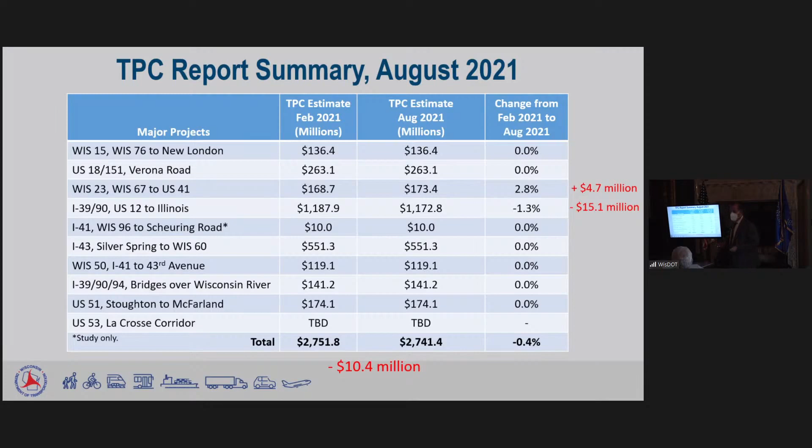I-39/90, all of the lets are done. It's open to traffic, and that project—I'll talk about the north-south project—those were two big projects where the change orders came in low on the project. So we were very pleased with those projects, and that's good work by the project team.

Let's go now to the Southeast mega projects. We had a $9.1 million reduction in the north-south project, and that's because all of the work, all the lets, are done. That project is essentially complete, and we were adjusting the cost estimate downward to reflect actual cost conditions.

The zoo interchange, there was no cost increase. We didn't reduce it because we're in the middle of the north leg reconstruction, so it's too early to talk on that. But again, good news—9.1, 10.4, that's the basis of a 19.5.

Joe, I think you have a question. Okay, Joe—looking at these graphs and tables, what are the actual project costs compared to the original estimates for those projects? Your data here shows February, August compared to February, six months. If you don't have it, that's fine.

We do, I just want to give it to you later. It's in the TPC report, in the back of tab 3. And then we relate those to the original project costs. Let me see, it looks like page five, right before the report starts with Highway 15.

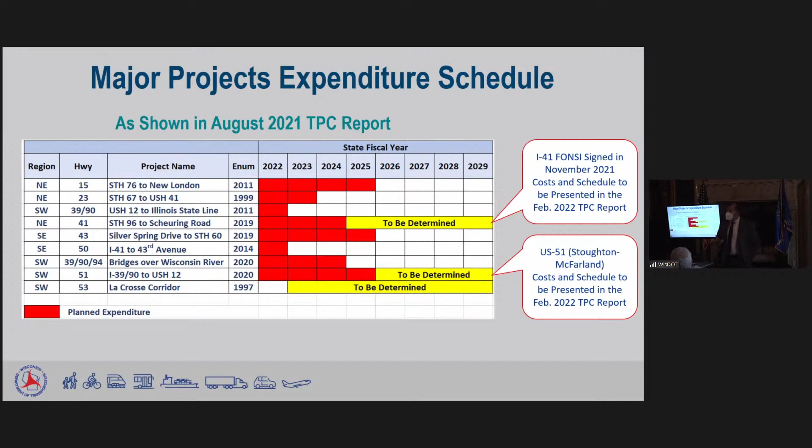And we just weren't able to get support to coalesce on a solution alternative. Secretary Thompson challenged us—he said, hey, can you broaden your thinking about ideas with respect to solution alternatives? The result of that, what Justin's going to present today, is a new approach that will address the needs on the corridor in a way that will be more consistent with local preference. So we're excited about that presentation today.

So now that we know the 41 costs and we schedule things in the next TPC report—if our program level stays at $282 million, and if we got future biennial program increases to match inflation—we're full through state fiscal 27.

And why that's important, I think, is because when we talk about La Crosse today—if you give us the okay on that—where might we be able to actually have funding for construction? It will be in state fiscal 28 and 29. There's room for projects. In 28, that's about $100 million of room, and in 29, about $200 million of room.

Timing, that seems like a long time. The timing, we think, works out pretty nicely. Environmental documents do what they do. Say the environmental document is 3 years, 22, 23, and 24. Final design could be a 2-year process, and then maybe a year to procure, get all the utilities wrapped up before you start. So let's say that's 25, 26, 27. By the time we're ready to rock and roll with hardcore construction, we would have significant room in the program to fund that construction. That's the point of showing this slide, because it will be relevant to the project later.

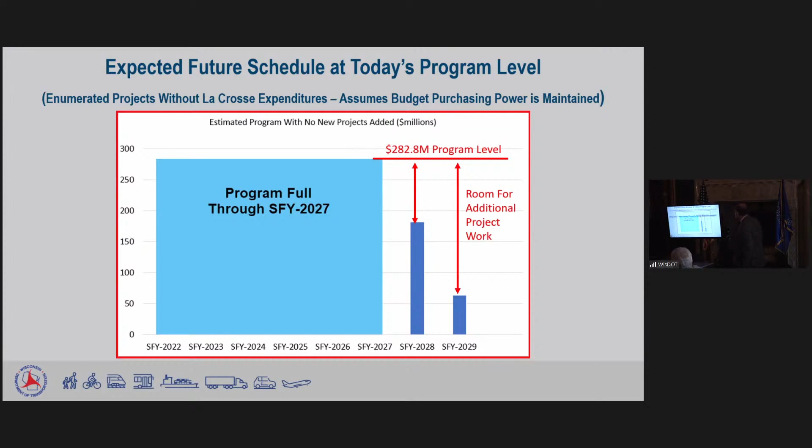So why aren't we recommending new study projects? You'll remember we talked about 39/90 Madison to the Dells. We're studying US 51 from the Beltline north to 19. We have a Beltline study going on. We're not recommending new projects this year. The statutes tell us if we're going to recommend studies, we have to give you an initial list by October 15th of the odd year. And we didn't give you one. And here is why.

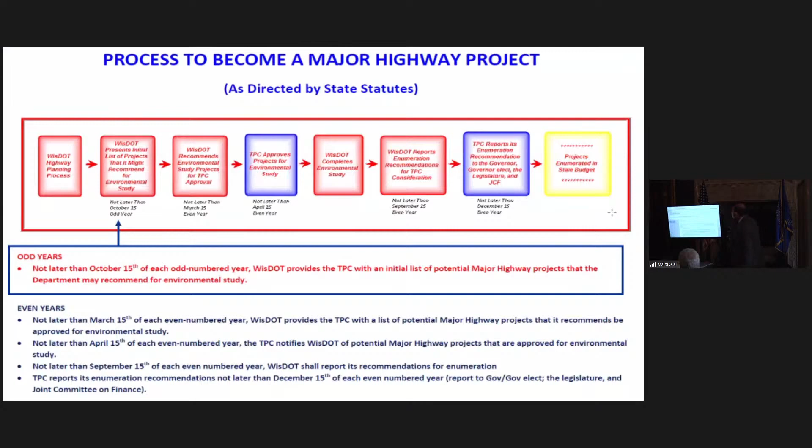Statutes that we went over last time, if we were going to recommend a study to you and ask you to recommend its construction, statutes require that we have some hurdles that we meet for you to make those recommendations. One is that if we have to make the recommendations in the fall of the even year, so that next July, which is when the budget we would hope would come in, we have to demonstrate that we could start construction within 6 years, not only on every project enumerated, but also on the studies you'd be approving.

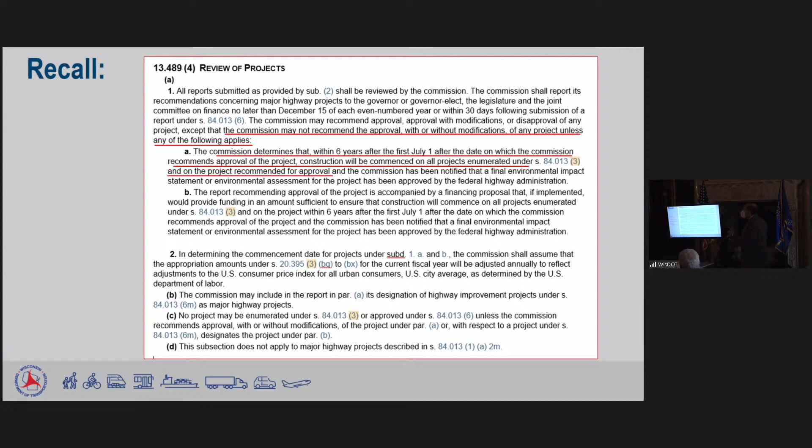Well, I mentioned we talked at the last meeting, 39/90 Madison to the Dells, premier recreation and freight corridor. That's a priority for us. So that, and we have pieces of 51. We think that project might come in stages. We would want those to be the next projects likely that will be coming to you and asking you to recommend. And with those as our priority, it's just too soon to recommend other studies.

Because if we couldn't build them and they have to sit, two things happen. The first one is that Federal Highway Administration will not sign an environmental document unless we have a reasonable path to construction. For major highway projects like this, they've usually signed them on a study recommendation contingent upon your recommendation and enumeration in the budget. So if we had a study out there that we had to wait on for several years, we wouldn't get it signed. And even if they did sign it, having something sit for a couple years, we might have to come back and revisit it and spend money on the study. So that's the reason why we're not recommending studies this year.

It wouldn't be unreasonable to think that in 2 years from now, we might have a study to recommend.

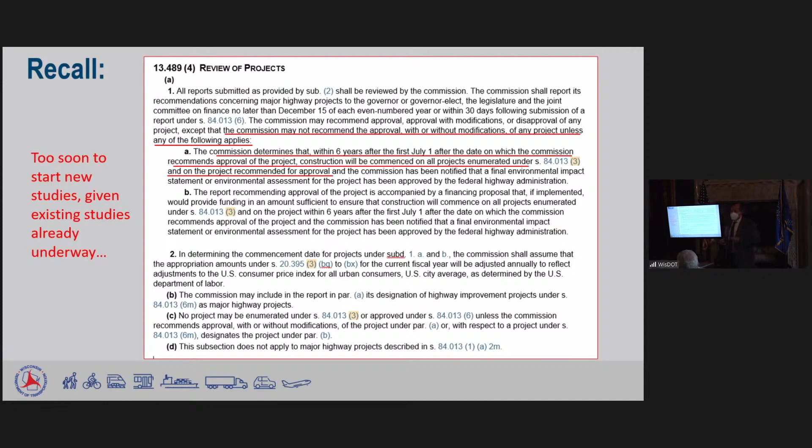And if there are no questions for me, Jeff Gust is next up.

While we're waiting for Jeff to get mic'd up, we did just get a bid for our letting yesterday. We did see some modest letting savings, again, about 1.2%. So at least it wasn't up. It was better. So that's good.

All right, can you hear me? I'm Jeff Gust. I'm the Bureau of State Highway Programs Director. So I get the fun part of the job. I get to talk about the enumerated projects, what's going on, the status, how things are going on the projects.

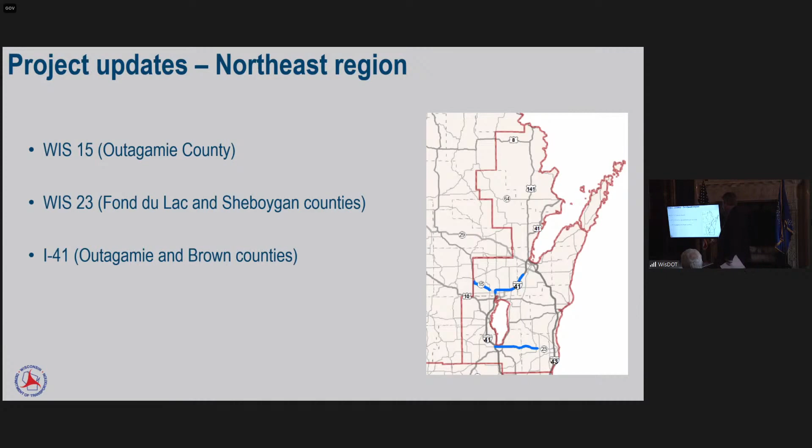So I kind of broke it down into geographic areas when I talk about the project. First I'm going to talk about the Northeast region. We have 3 projects in the Northeast region: Highway 15 in Outagamie County, Highway 23 in Fond du Lac and Sheboygan counties, and I-41 in Outagamie and Brown counties.

So the first project I'm going to talk about is Highway 15, and it runs from New London, and it goes to, with a bypass around Hortonville, and ends up at Highway 76. Now, the projects on the right-hand side of the screen, or the east half, have already been let. They're actually under construction on the bypass around Hortonville right now. They're working on marsh excavation there. And the west part will happen later. So the eastern part is expected to be open in late 2023. And that western, a little less than a third, would be late 2024.

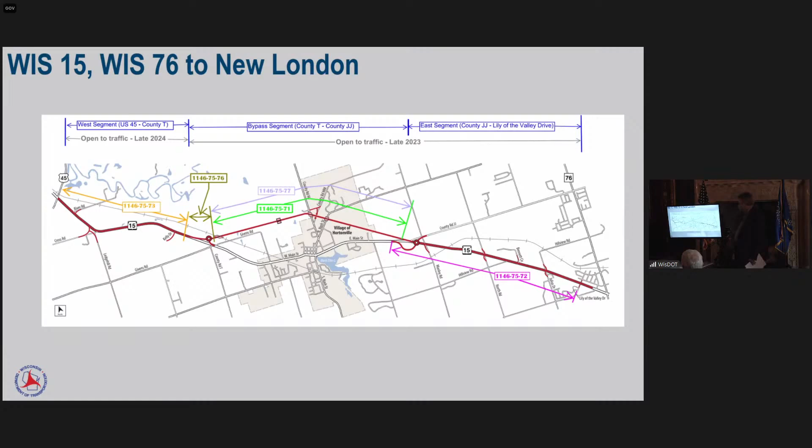Then I got some fun pictures to show you what's going on. So on the bypass, there's a lot of marsh, and they have to get through the marsh to get to things.

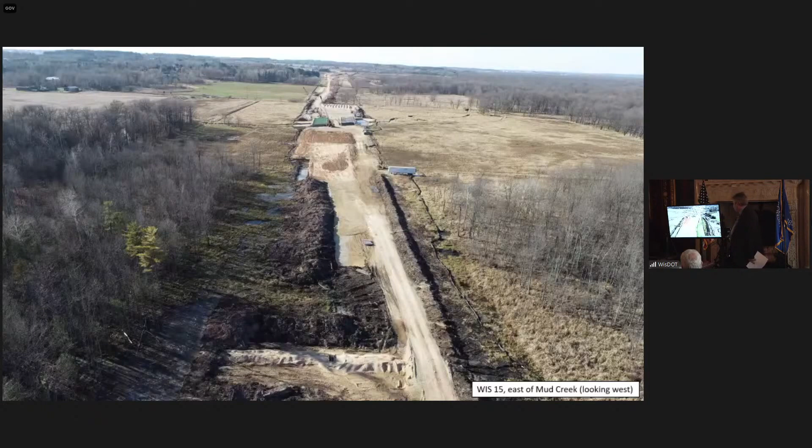This is just another picture of a grading operation. We're actually looking at County Trunk M and Mass Street up here. You can see the contractors filling in dirt, the bulldozer and the 6-wheel truck bringing in materials. And we're doing a good job with the environment. You can see that as they get the fills up, they already have the topsoil back on, erosion mat on, and vegetation is already growing. So we're doing what we can to minimize the impact.

The next project I'm going to talk about is Highway 23 from Highway 67 to Highway 41. So this is adding from 2 lanes to 4 lanes. As of today, from County W to the east has already been opened, so that's 12 of the 19 miles opened up and ready to go. We're working on the other part of the project right now, and this project does include a new interchange at G and at UU.

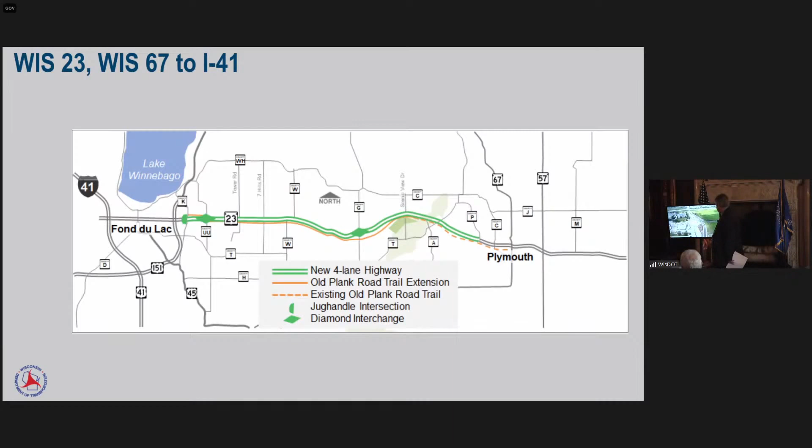So I have a picture here showing where we're building the roundabout. People are liking roundabouts a little bit more now, but it was under construction. To make this work, we had to build a temporary bypass. This is an Aurora healthcare unit over here, so we needed to get people to and from the healthcare unit at all times, keeping things open. We were able to do that by building this temporary road around while we built the roundabout. Now this has already been removed, but it worked for that. We just couldn't detour this route - you had to keep it open at all times.

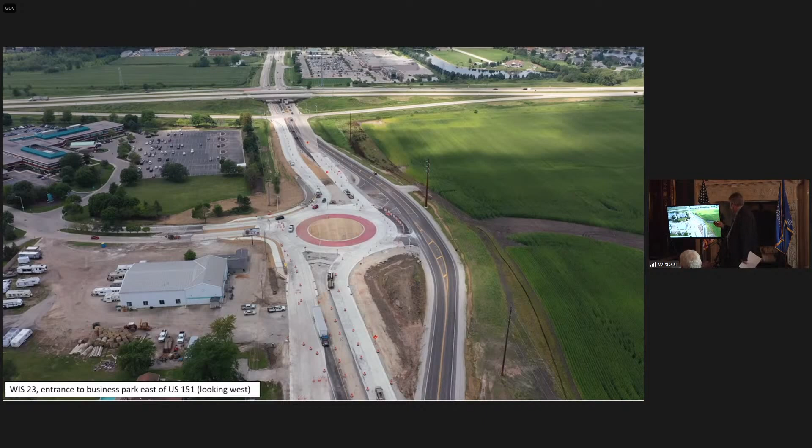And that's 151 in the background. So here's another example of what's going on here. You can see the interchange up above there. To get access, sometimes when you're building more of a freeway type facility, you have to take some access away. So the local street's tied in and ties up there.

This next road is the Old Plank Road Trail bike and pedestrian trail going there. Just to show you we're cost conscious, you can see the 2 lanes of traffic and one is black and one is white. Normally on a lot of these major projects, you'd be building everything brand new, but what we did here is we had some life left in the existing lanes. The westbound lanes are blacktop because we found we could just resurface it and get more life out of it, so there's only new lanes in the eastbound direction. We're doing what we can to maximize the life of the roadways that we have.

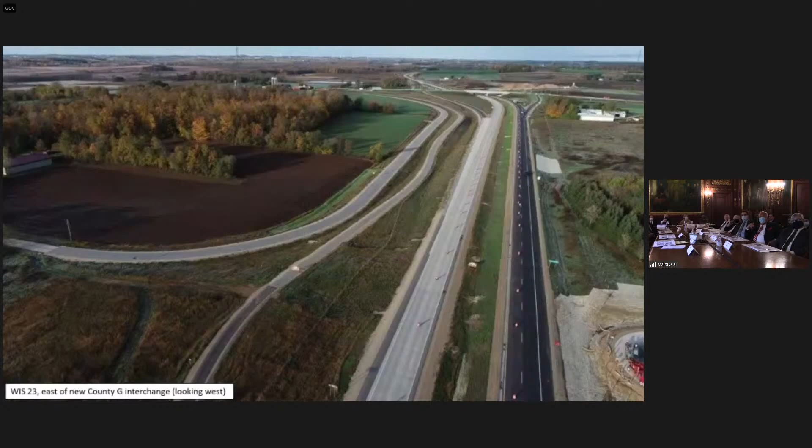Question for you, Jeff - can I ask you, that blacktop, what's underneath that? Is that concrete or blacktop underneath? I'm pretty sure it's blacktop underneath, but I don't know all the layers on that. Tom, do you know? It's concrete underneath. So do we know what the long-term effect of that is, going blacktop over concrete? Yes, we do. We do life cycle analysis to make sure we do the right treatments at the right time.

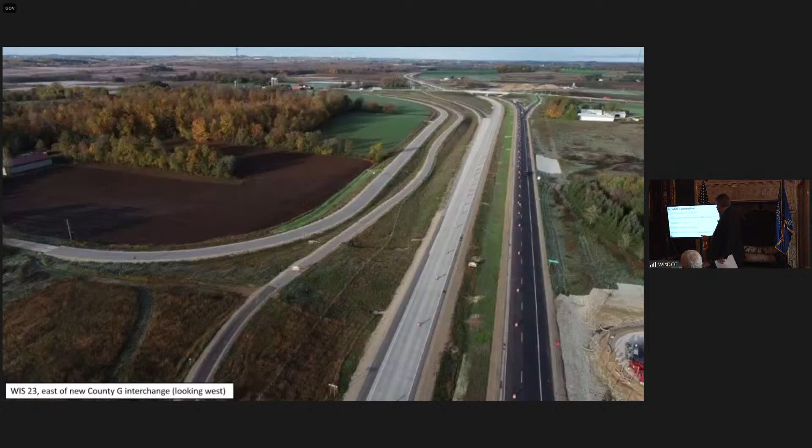The next project I have is I-41. This project is 23 miles long and runs from Highway 96 in Appleton to County Trunk F in De Pere. There's a total of 12 interchanges within that corridor. We're reconstructing 7 of them, one being the one at the 441-41 system interchange, and one new proposed interchange just south of County Trunk Highway F, for the Southern Bridge corridor. The other interchanges are only getting ramp work done.

This project was just enumerated in the 19 to 21 budget. As Joe had mentioned earlier, we just had a finding of no significant impact from the environmental document. There will be beginning final design in January of 2022, and we anticipate construction to begin in 2025 or 2026.

What I have here is the newest information. Once we get the environmental document done, we know what the project is and we can get a good first estimate, so this will be in the February TPC report. The estimated total project cost of this project is $1,063,000,000 in 2021 dollars, and in year of expenditure dollars, it's $1,255,000,000.

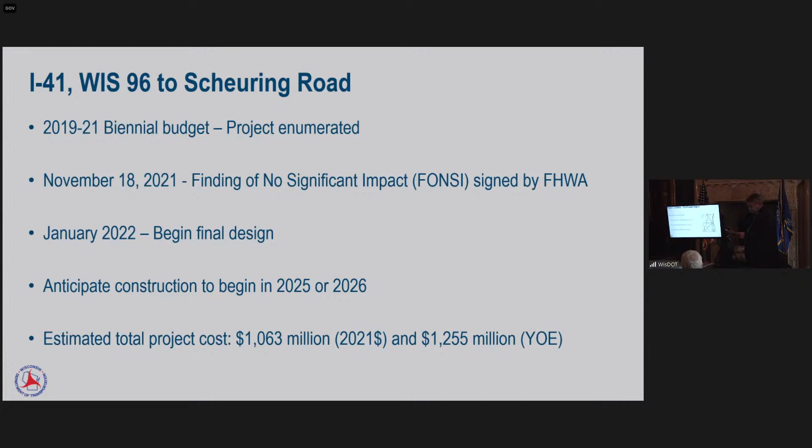All right, the next project I'm going to talk about is in the Southeast region. We have 2 major projects and 2 Southeast Freeway mega projects. The major projects are Highway 50 in Kenosha County and I-43 in Milwaukee and Ozaukee counties, the north leg of the Zoo Interchange in Milwaukee County, and I-94 east-west in Milwaukee County.

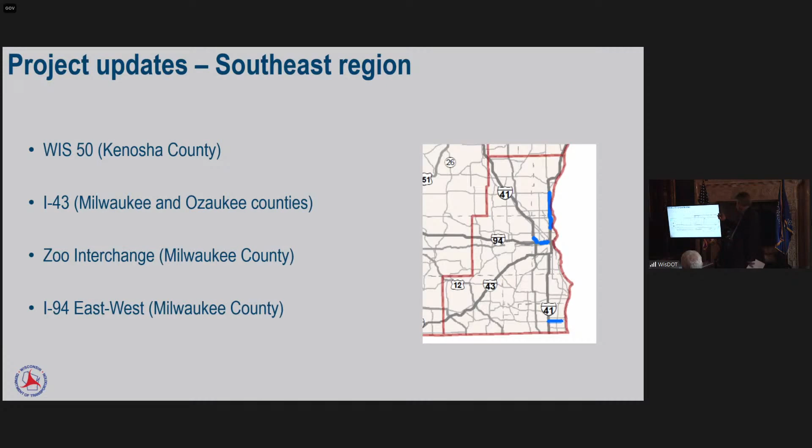First project I'm going to talk about is Highway 50, and this is currently under construction. It's in kind of an urban area. They're under construction this year in '21, and the other half in '22. Everything will be opened up by the end of '22. There may be some cleanup work left in '23, but the main lines will be open to traffic.

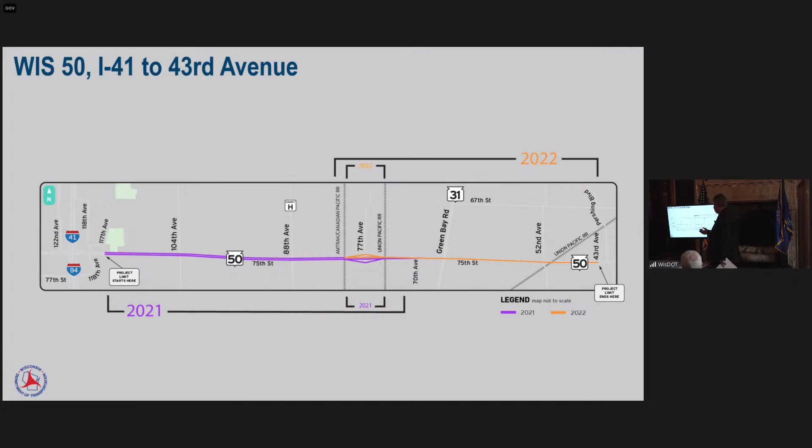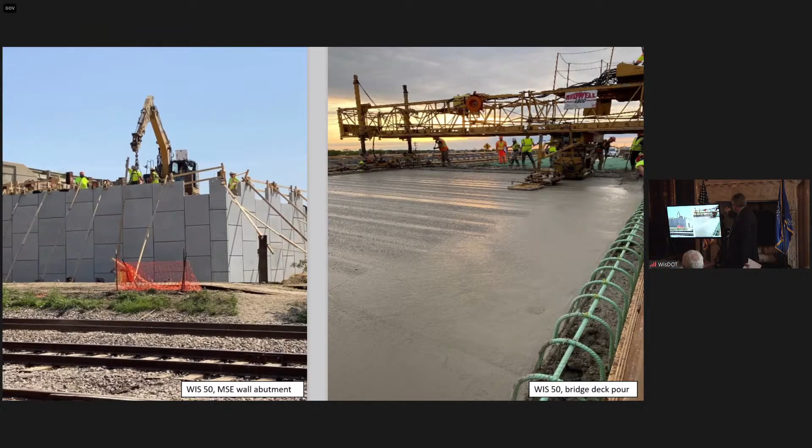And I have some nice pictures of this. This is a mechanically stabilized earth wall, that's for abutments for a railroad underpass. We have a finishing machine that's finishing a bridge deck right now. You can see the future parapet there. And this is some false work and overhang brackets for a bridge over the railroad.

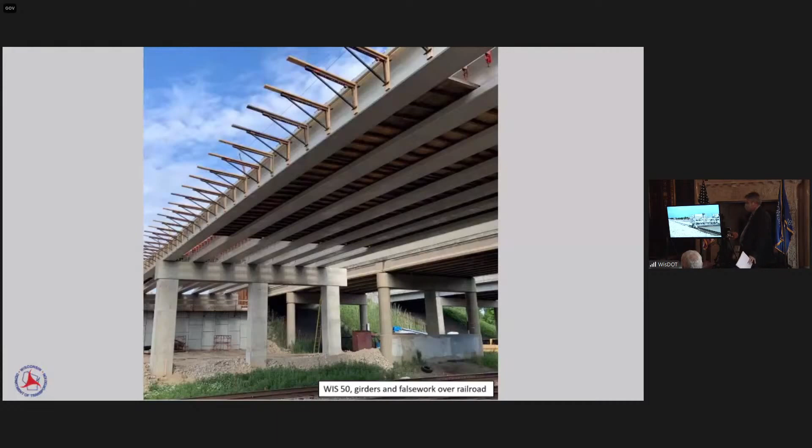So the next project I'm going to talk about is I-43 in Silver Spring, from Silver Spring Drive to Highway 60. This project was recommended for enumeration in 2014, but wasn't enumerated until the '19-'21 budget. We just started letting projects this year.

We had a work zone prep contract that was let this fall. I think there's actually another letting yesterday that I don't know the results of yet, but some of the big project highlights are: the project is 14 miles long, and it's going to be expanding from 4 to 6 lanes. We're going to be constructing a new interchange at Highland Road in Mequon, and we're going to be converting a half interchange to a full interchange at County Line and Port Road. One other thing that's happening is, as I've talked about before, diverging diamonds - we're going to be putting one of those new diverging diamond interchanges in at Brown Deer Road. That one has loop ramps right now and has safety and mobility issues, and we think that diverging diamond interchange will really help that out a lot.

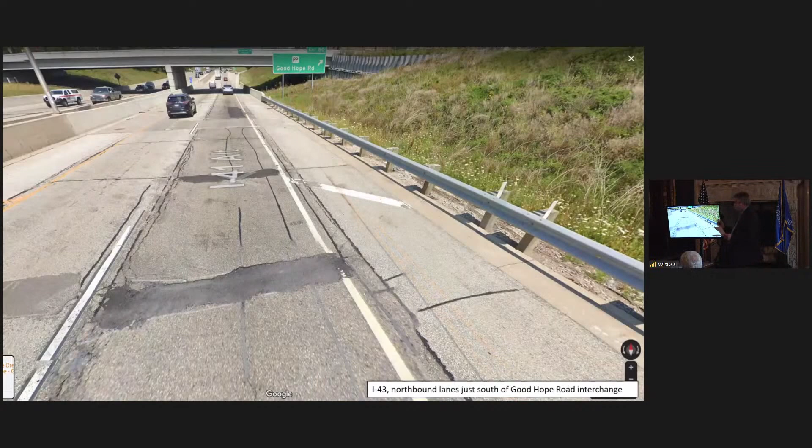This other picture I have is just south of Good Hope Road, showing the condition of the pavement, which is in really bad shape here. We do get a lot of complaints about I-43 and the pavement conditions.

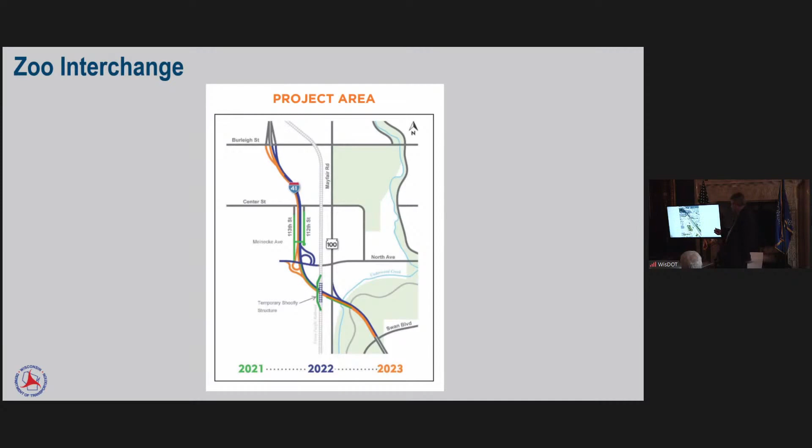The next project I'm going to talk about is the Zoo Interchange, the north leg in particular, which runs from Burleigh Street down to the Zoo Interchange core, and that's under construction right now. One important feature is another railroad issue: we have to build a temporary shoofly structure around the railroad so we can reroute it, then rebuild the existing structure this year. We're working on that. I've got a couple other fun pictures of the project.

This is looking at the Meineke Avenue overpass, and you can see contractors working on both sides of the road. We have multiple lanes of traffic still flowing through the project well, and that's Mayfair Mall in the background, to give you an idea where we're at.

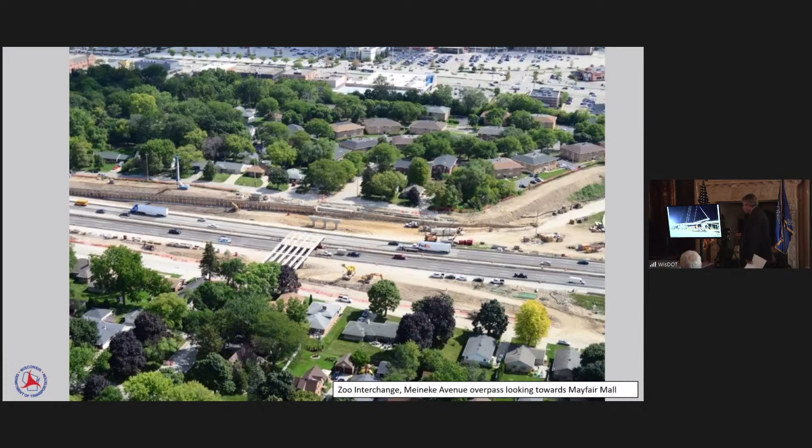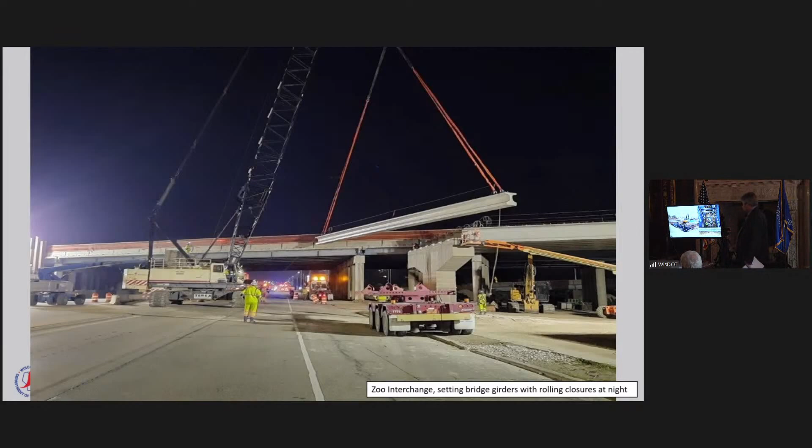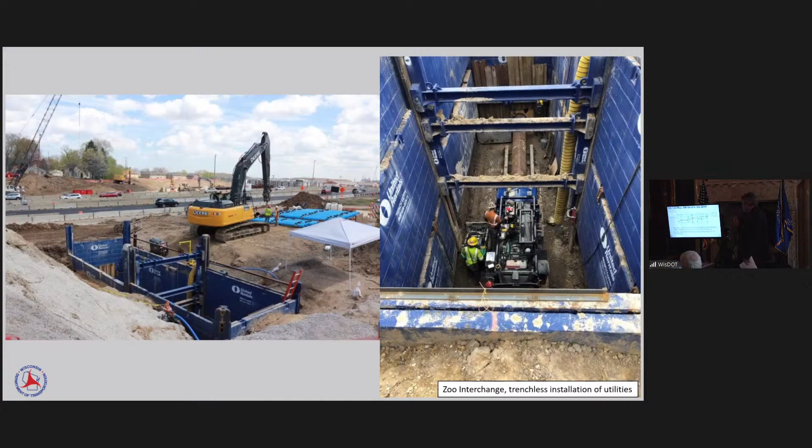The next project I'm going to talk about is I-94 East-West. I talked a bit about this at the last meeting — remember, it's the tie between the Zoo Interchange and the Marquette Interchange. Since the last meeting, in April of last year we announced we're going to do a supplemental environmental impact statement for the project, evaluating both 6 and 8 lane alternatives. Then last July, the project was enumerated for final design and construction in the 21-23 budget.

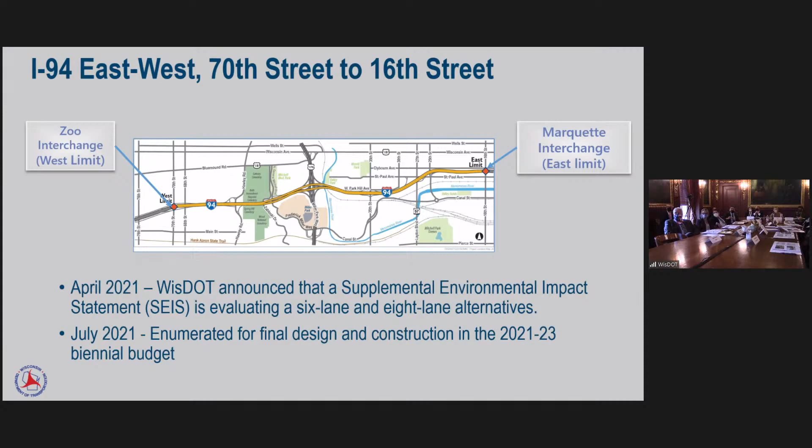At the public information meeting, we showed a comparison cost between the 6 lane half Hawley program, 6 lane full Hawley program—that Hawley Road is the interchange—and then the 8 lane program cost. The 8 lane program cost was 1.28 billion, like you had mentioned. The 6 lane with a half Hawley program is $1.23 billion. So not a huge difference in those program costs.

It's just the beast of construction. When you start ripping up everything, the additional lanes just don't cost all that much more.

Does that answer your question? Thank you. Okay, all right, thank you.

And Bob, you can confirm what was at that public information meeting is the most current information, correct? That is correct, and that is available on our website. All of the 49 boards that were shown at the public information meeting are on our website. All right, thank you, Bob. You're welcome.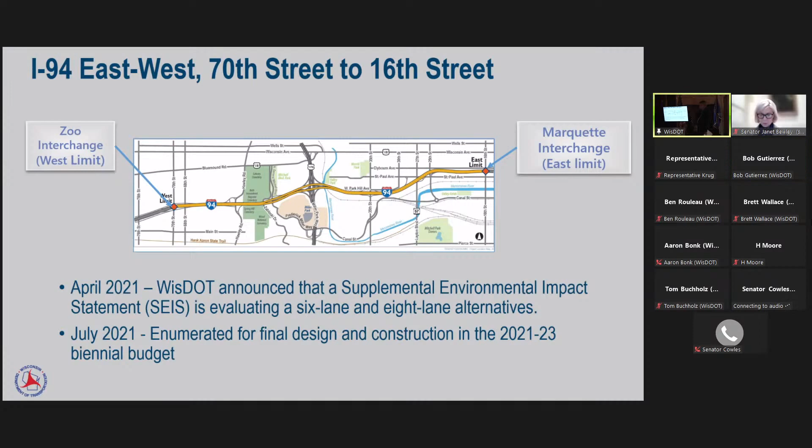The next set of projects I'm going to talk about are in the Southwest region. We have Highway 51 from Stoughton to McFarland. We have 39/90-94 bridges over the Wisconsin River, and 39/90 from Madison to the Illinois state line.

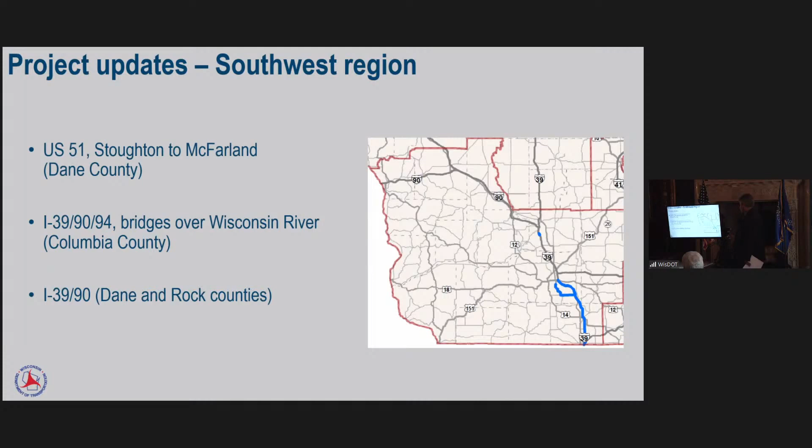The first project is Highway 51 Stoughton to McFarland, and the TPC approved that project as a high cost major at last year's meeting, and we're working on the project right now. The project itself starts out at the Beltline, goes through McFarland, through the city of Stoughton, and ties back into 39/90. They're working on it now. We expect construction to begin in 2025 or 2026.

The next project is the Wisconsin River Bridges. Again, that's a project the TPC approved as a high cost major at the last meeting, and we anticipate construction to begin in 2024. One note about this is that we also have a study going on about what's going to happen between Madison and the Dells on 39/90, and what we do here will be incorporated into that bigger project.

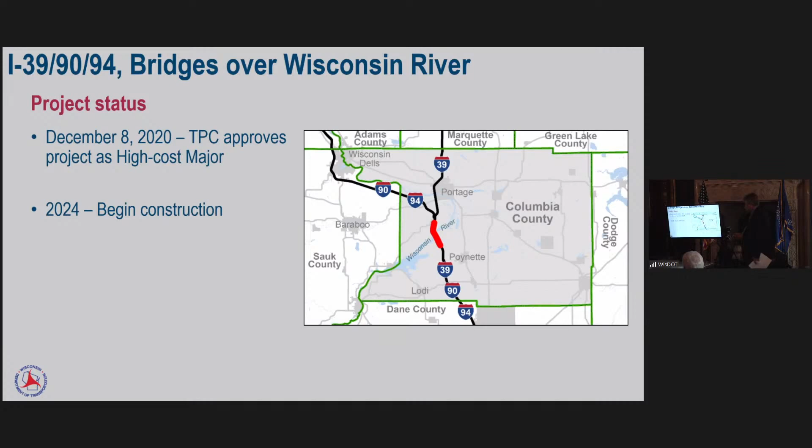So the next project I'm going to talk about is 39/90 from the Beltline down to the Illinois state line. You can see this picture—we have 3 TPC members in here. We have Governor Evers, Secretary Thompson, and Representative Spreitzer here, all at the grand opening.

On that project, the main line is all open to traffic. There is some cleanup and side road work next year. It'll be reconstructing and expanding 45 miles from 4 to 6 lanes. There's a small section in Janesville that actually goes from 4 to 8 lanes. They are reconfiguring 11 interchanges, including 2 system interchanges, one at I-43 and one at the Beltline. They're going to be constructing a total of 104 bridges in this project. This project has the state's first diverging diamond interchange, and we also have 2 additional diverging diamond interchanges.

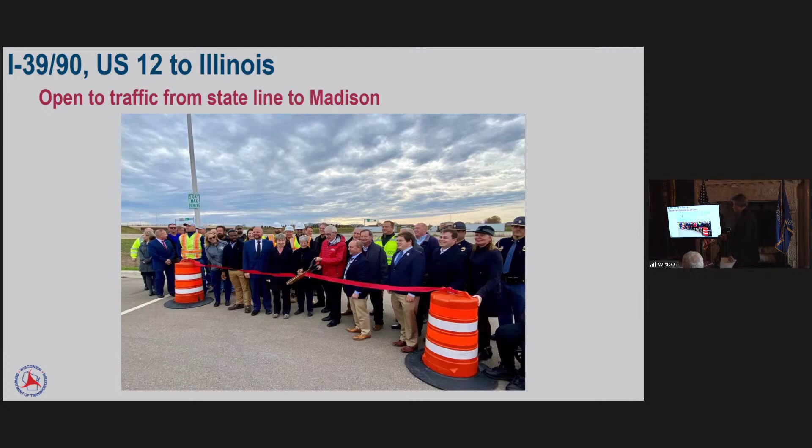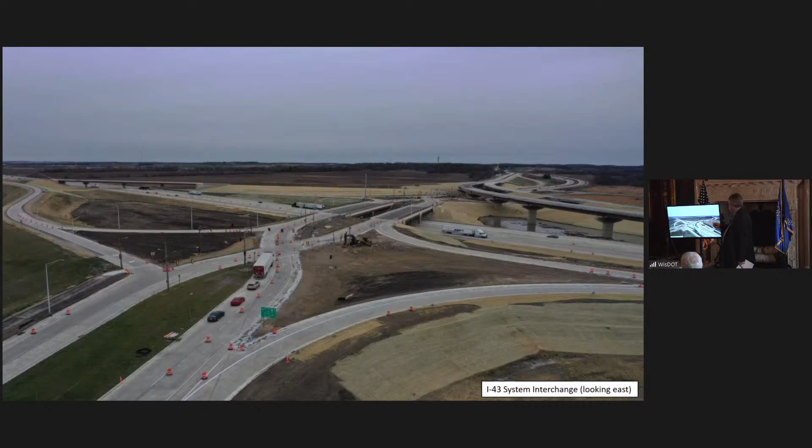I just have a couple neat pictures of this—I got 2 pictures because I really kind of liked it. This is I-43 going to Lake Geneva and Milwaukee, and I-39 going north, and you can see the diverging diamond interchange and the I-43 system interchange there. I actually got another picture, more of an aerial view, looking east, kind of the same thing, but it gives you a picture of the magnitude of that interchange.

Now the next thing I've got to talk about is the Beltline Interchange with 39/90. One thing to note here—I'm going to run this video for a second—right now you can see the traffic coming up has to make a decision point and make a split whether you're going left to go to Madison on the Beltline or keep going north. Where the main line traffic comes in, they have a very short period of time, and it's on a curve where they have to match in from the Beltline, the traffic coming from the Beltline around the loop ramps to come up in here. So there's a lot of accidents and a lot of problems up there.

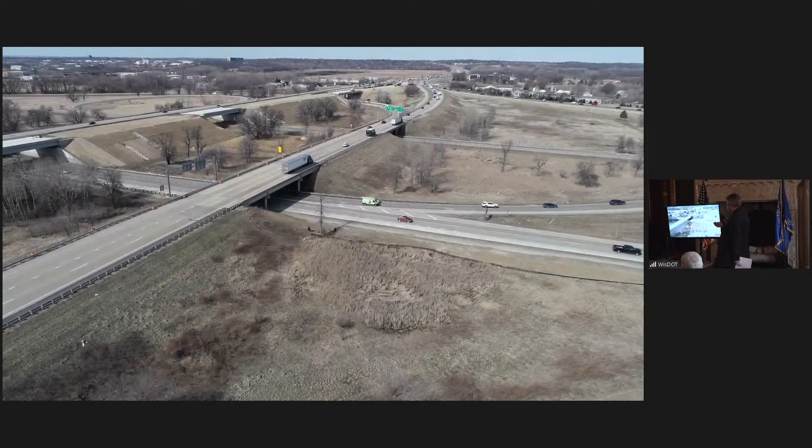I think the solution they came up with here was excellent. It was cost effective and it did a great job of solving the problem. I'll show you a little bit—this is what traffic looks like today. You see this weave merge has a lot of traffic there, and these people have to make a decision here and a decision there. That's kind of what the graphic shows. See traffic going in, and you can see part of the solution is the through traffic is going to be where we're building these new bridges here along there. Then this is essentially going to be a big ramp.

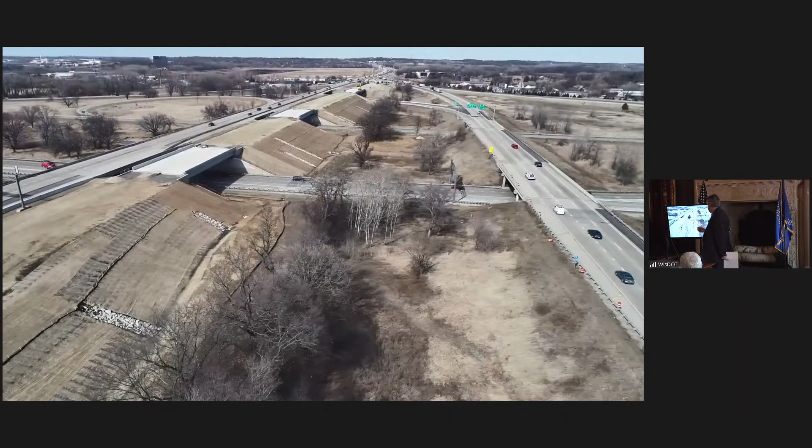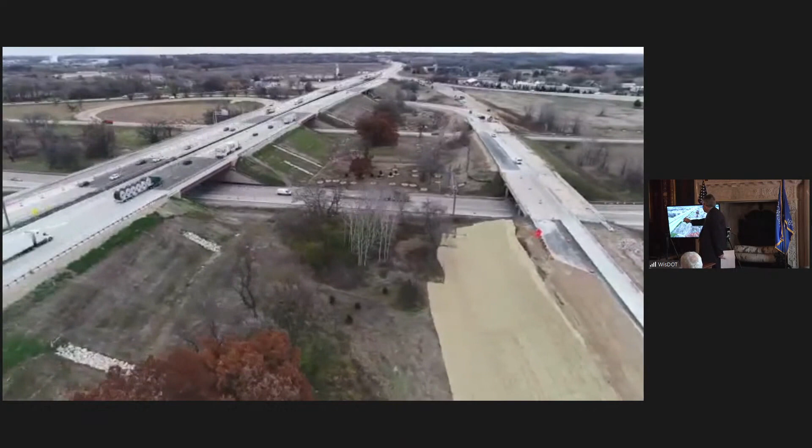So it's going to start in a second and show this is what it is now. This is going to be a ramp, and you can see the through traffic going along there. The beauty of this too is that we could get construction done without impacting traffic, made things safer, and you see the roads essentially straight there.

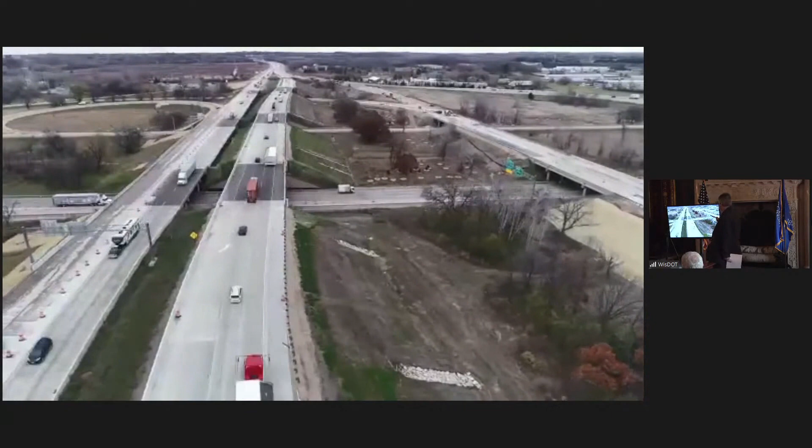And there's more lanes here, so this merge weave is much safer up here. And this is a right exit versus a left exit, and there's no additional decision points close by. So it's a really safe, really good alternative. I really think, as an engineer, it was a pretty awesome design and a change. And it was a change that lowered the cost of that interchange quite a bit. It gives us really almost everything that we wanted out of that interchange.

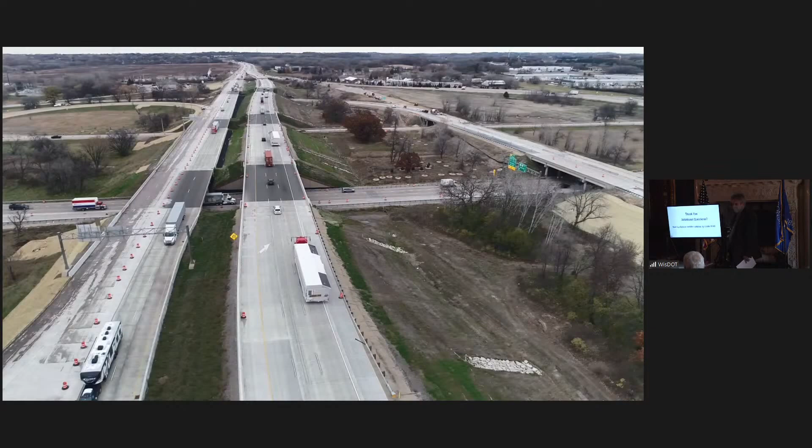All right, that's all I have. If you have any additional questions for me, otherwise, Justin Shell.

What is the cost of the interchange with the new redesign? This is a little dated. How much is that? Roughly $60 million.

Hey, thank you. My name is Justin Shell. I'm the Deputy Administrator for Division of Transportation Investment Management. I'll be talking about the La Crosse Corridor project. So this is currently an enumerated project in the major program.

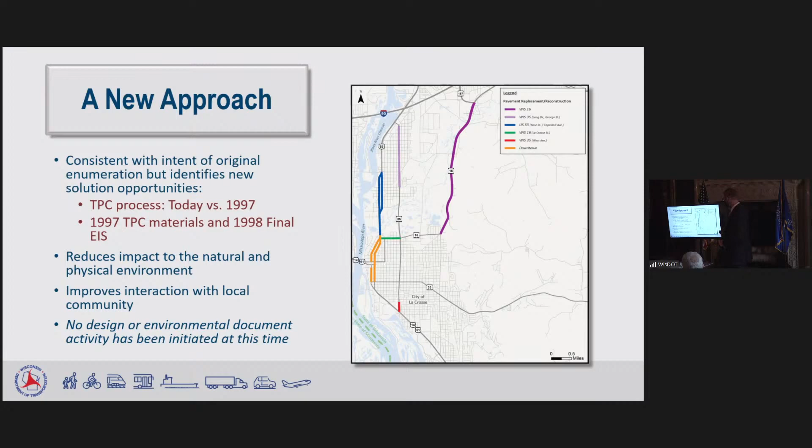So the project enumeration process today, as you probably know, WisDOT comes to the TPC and we request permission to study a project. If that's approved, we begin preliminary design, which might result in a final environmental document. If we have a final environmental document, we put a request to the TPC for enumeration, and you agree, that then goes to the legislature and is maybe approved in the state budget. At that point, we can begin final design and construction.

In 1997, WisDOT would come to the TPC, and we would make a recommendation to enumerate a project. If that was approved by you, we'll go to the legislature. If it's approved in the state budget, we then had approval to complete preliminary design, begin final design and construction. So it's a very different process from the perspective of where the environmental document comes in. The environmental document under the old process was not necessary for enumeration. Today, we have to have an environmental document before we can be enumerated.

Why that's important, we think, is because in 1997, when we came to the TPC, we didn't have a final document. We were certainly able to talk about the alternatives that we were studying, but we didn't have a preferred alternative. We didn't have an approved alternative because that record of decision came later.

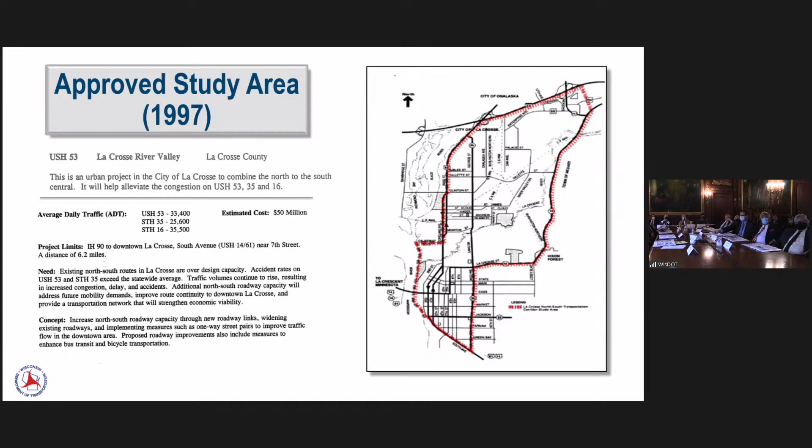There's something important to point out there as well, and we've gotten ample answers from our audit commission. Back at this point in time, that estimate would have just represented the brick and mortar construction estimate. No design, no real estate type of estimates, and no mitigation. So even then that's an artificially low estimate from what would be spent. It's just the way it was done then, and we don't do that today. Everything is included in our estimate. Any other questions?

Then the last thing I would just draw your attention to here in the concept, if you read through the concept, it's tempting to focus on this first sentence where it talks about increasing capacity, new roadway links, and widening. And that certainly is part of the how. I mean, that's when we're looking at all of the alternatives to addressing needs. Those are some of the alternatives, not all of them, but certainly some of them.

I like to focus my attention more on the why, because we don't have a preferred alternative at this point, and we don't know exactly what we're going to do. We have some good ideas, but the why we're addressing these needs is to improve the traffic flow and increase safety, as well as look at ways that we can enhance multimodal options in the region.

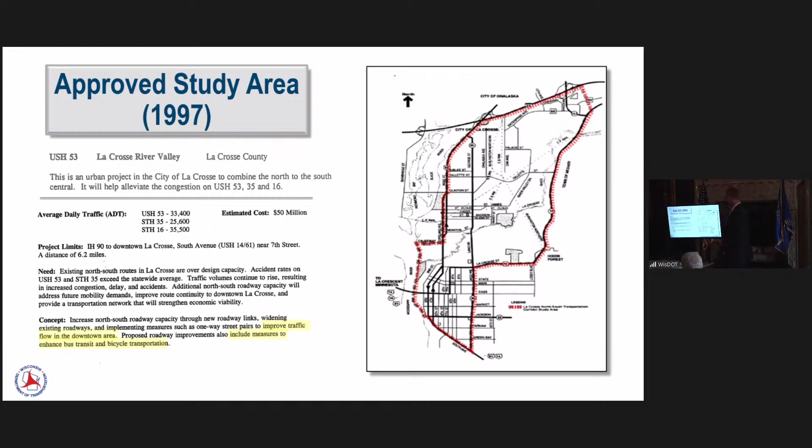The final EIS was signed in January of 1998. We had a record of decision a couple of months later. In that final EIS, again, talking about multiple alternatives that it evaluated, the preferred alternative and ultimately the approved alternative was alternative 5B1. And this is a map of that alternative.

Now, if we bring us back to the enumeration, it's certainly interesting to look at because we see US 53 approximately 6.2 miles. And when we look at the preferred alternative, what we know here is that this alternative was proposing new alignment going through what is the marsh in La Crosse. And it was also going to, I believe, go on some local roads that would certainly impact some of the established neighborhoods in the city.

And if you look at that length, it's about 6.2 miles. So there were several alternatives that had very similar, or at least a couple of alternatives with similar looks, but this being the one selected, I'd also draw your attention to the fact that that's not the only part of this alternative. Again, we were looking at multiple corridors.

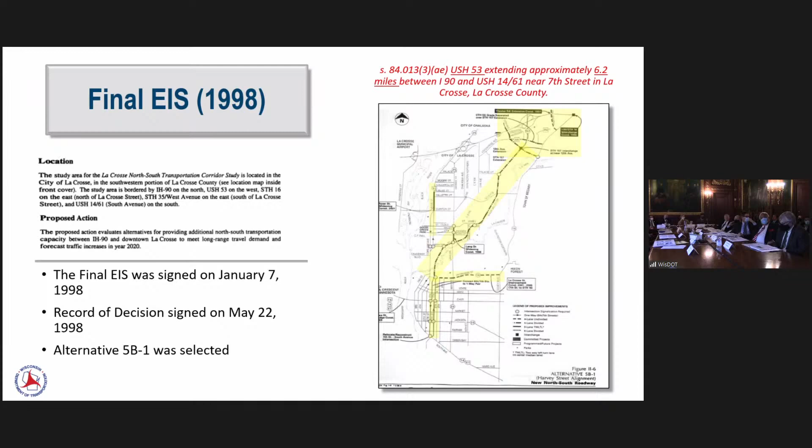So from 1997 to present day, as we've said already, in terms of local support, there's been some opposition to this approach for several reasons. We've continued to study this area over the years.

And so now as I move into talking about the new approach, the question might be, well, that's great, but why do we need to keep the current enumeration? There are a couple of reasons. We think that by continuing to use the current enumeration, we're able to keep costs lower than they otherwise might be and deliver the project more quickly.

What I mean by that is, if this project weren't done in the majors program, it would have to be done in the state highway rehabilitation program. In that program, it would be competing with all of the other needs in the Southwest region, and that affects our ability to do them in a timely way.

We don't know exactly what that would be at this point, but we can certainly say they aren't going to happen as quickly as they might if this project is done through the majors program. That could potentially introduce delay either into completing these projects or completing other projects in the Southwest region.

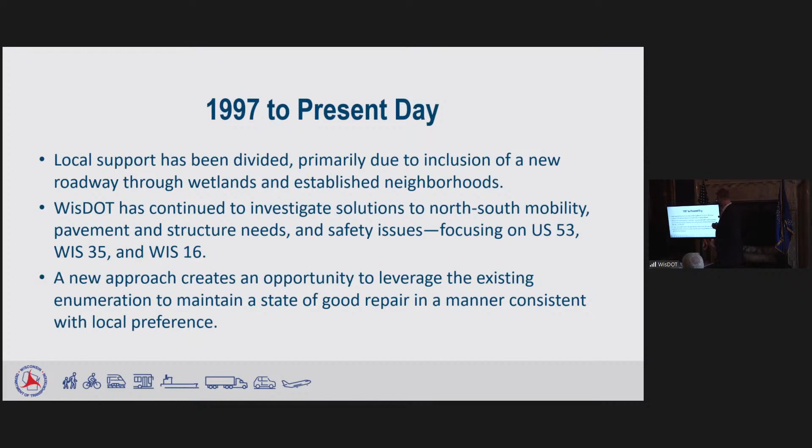So the new approach—again, this is an important piece of this. What Justin was saying is that if we didn't do this under the majors, we couldn't do it this way in SHR over the same time period.

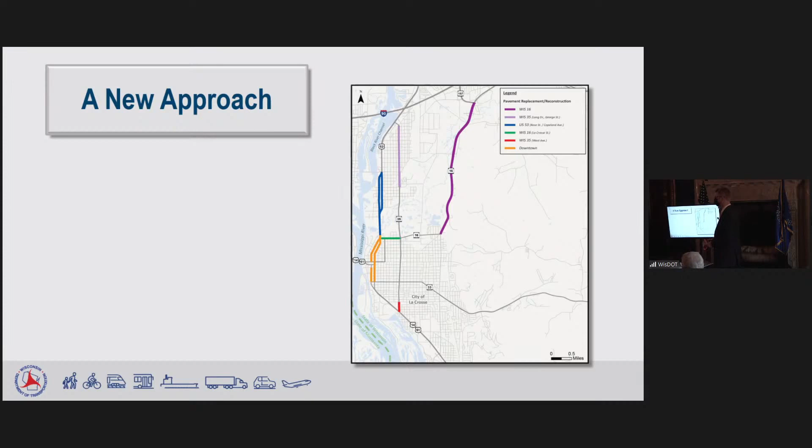In fact, if this weren't approved today, and we wanted to do the same thing, the only way we can do this, because of the costs, is through the majors program. So we'd have to come back to you again if we wanted to do it this way, and if you said no, we would have to break it up in parts and do it as we could afford to do.

Justin mentioned, we haven't done any design, we haven't done any environmental work. We didn't want to presume that you would approve that, and we don't want to spend money without approval.

We did an estimate of this project, and we think it's in the $200 to $250 million range. The point is it's far above the high cost major threshold. So why we're here today is because the corridor is enumerated. We think there is sufficient consistency with the past enumeration and what we want to do to leverage the current enumeration and save time in the process.

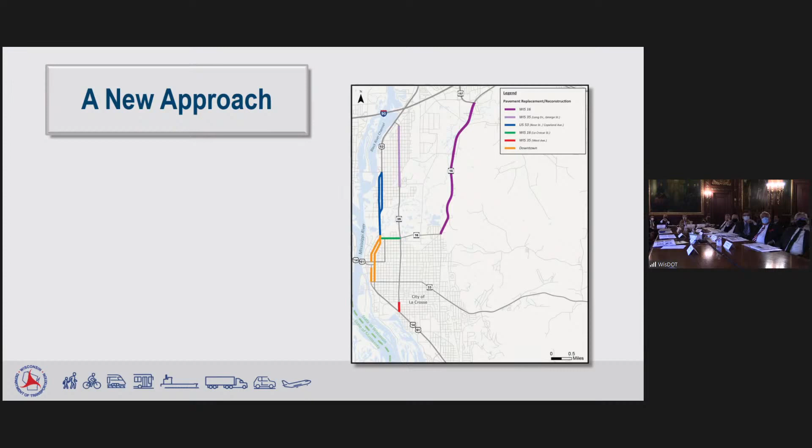The map here on the right shows all of the routes that we would be looking at. Going back to those core goals, we think this is consistent with the original intent because it focuses on the same routes. We're focusing on maintaining a state of good repair by looking at pavement and structure needs, looking at safety. We will be looking at operational improvements at intersections where practicable. I'll come back to that in a slide or two.

We also think there are some opportunities to address safety specifically at intersections and on bicycle and pedestrian safety. We think there are opportunities to enhance bicycle and pedestrian safety, which we'll get to in a couple of slides. All of the colored areas are where we would be looking at pavement conditions, but we think there are some opportunities in other areas where we might be able to increase safety.

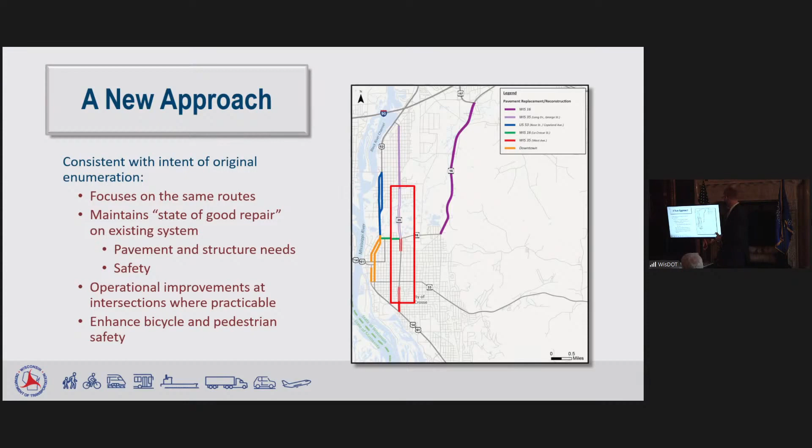Throughout the study area, the capital needs on these roads - 100% of what our asset management program says is that 100% of the corridor will warrant some type of improvement in the next 22 years. So there are obviously needs out here. And as Joe was alluding to, rehabilitation isn't really the most cost-effective alternative for most of these roads anymore. So this approach allows us to get to those roads faster, and more cost-effectively.

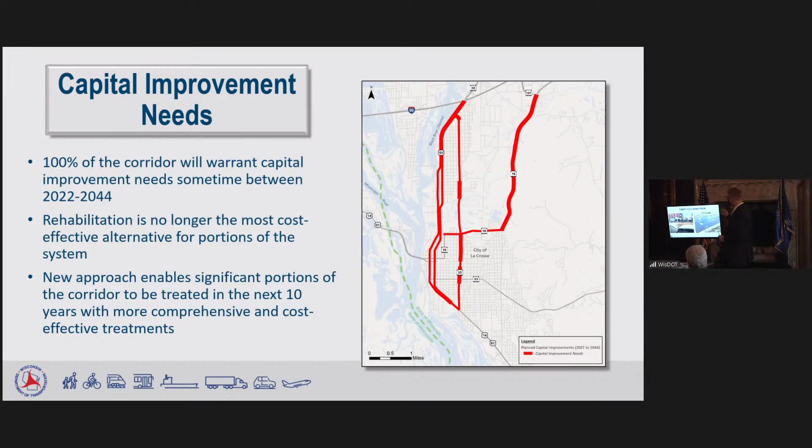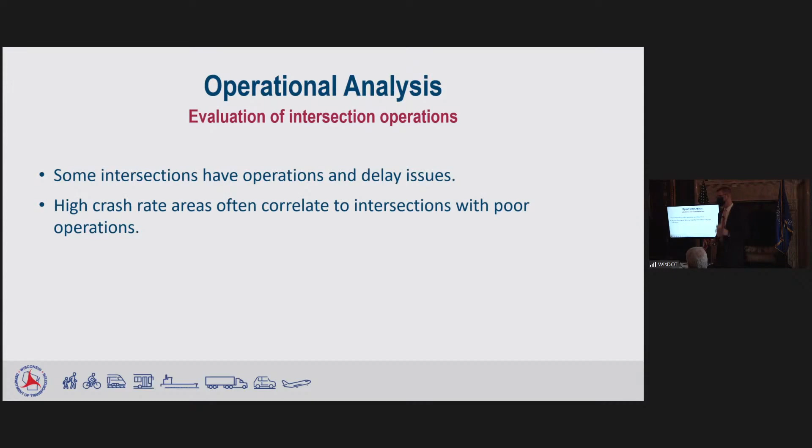Operational analysis, evaluations - we know that some of the intersections have delay issues, so we'll be looking at those. We also know that high crash rates often correlate to intersections with poor operations, so again, we'll be looking at safety. We anticipate we'll have to improve some intersections, others we won't. But going back to that word, where practicable, we know there are going to be some places where we have physical constraints that won't allow us to perhaps do the improvements that we want at intersections. That's just a part of the process that we'll have to work through.

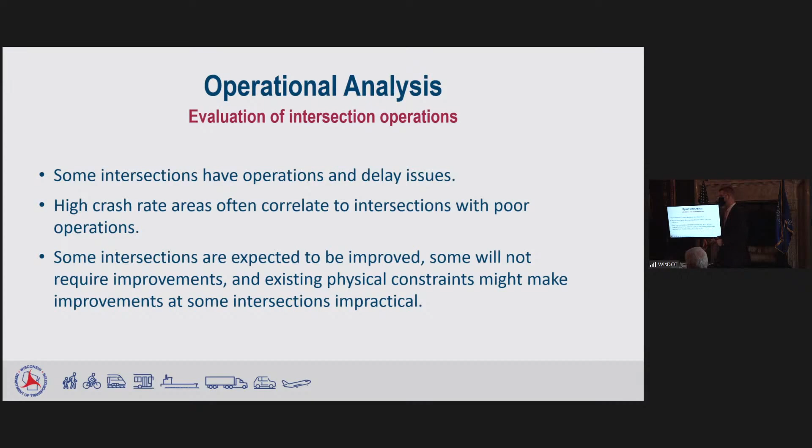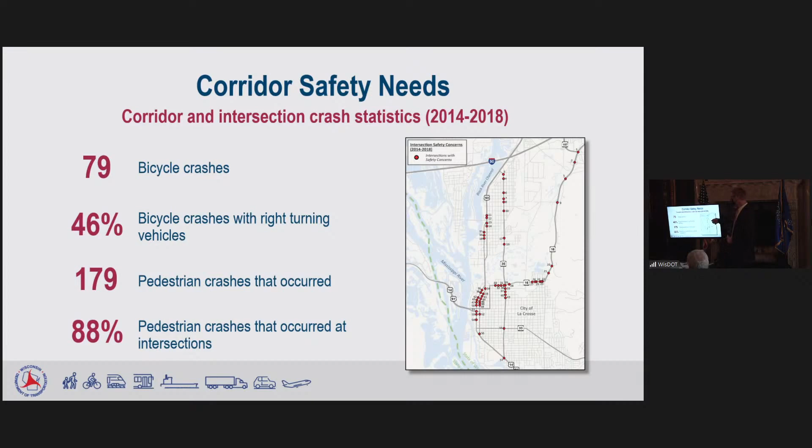Safety needs - I just wanted to provide you with some quick statistics. 40% of the corridor is at least 50% above the statewide average for fatal and serious injury crashes. 70% of those are occurring at intersections, and 57 of the intersections have safety concerns. Talking about bicycle and pedestrian safety earlier, 79 bicycle crashes in the study area, with 46% of those involving cars making right turn movements, and 179 pedestrian crashes, with 88% of those occurring at intersections.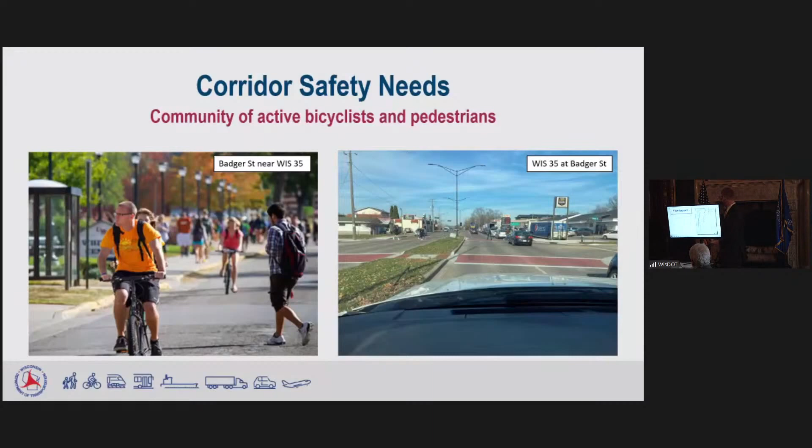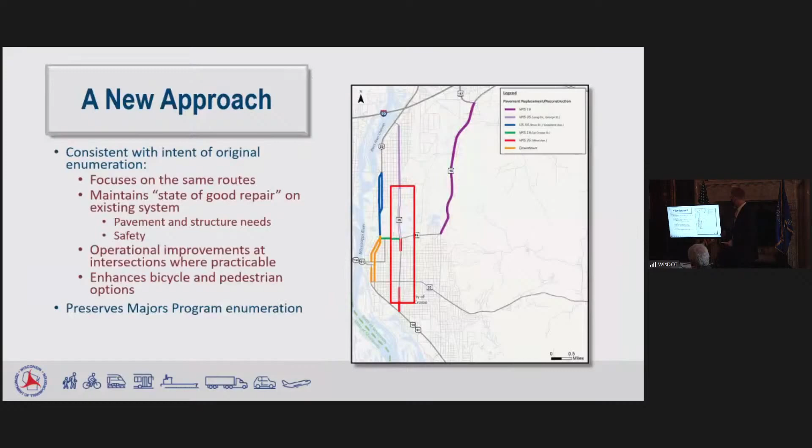Just to wrap up quickly, again, we think this is consistent with the original enumeration, that we can continue this work under the existing enumeration. Just to emphasize up front, we haven't worked on any design or anything like that. If we get approval to continue, we would be working with FHWA to determine the best way to put the old record of decision aside and begin working on a new environmental process. At that time, we begin working with local stakeholders.

Is there any questions for Justin first on that?

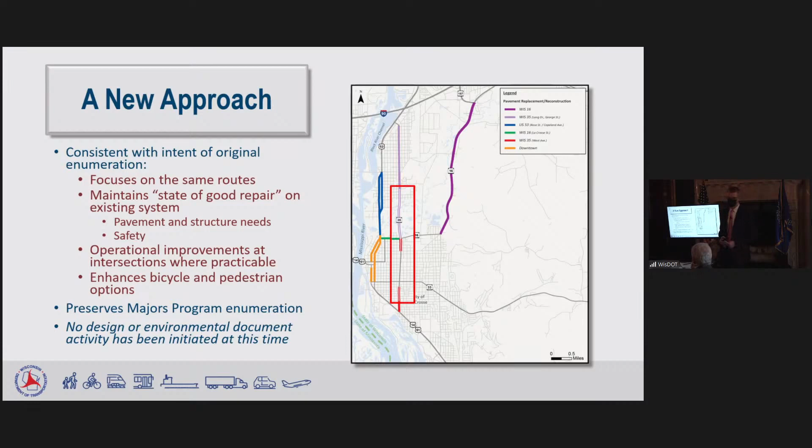This would all be along existing corridors, then this wouldn't be a new corridor. Exactly, the approach here is to fix what we have. We're not looking at building new roads. The operational improvements would really come at the intersection improvements.

Senator? Yeah, thank you. So you brought up the original enumeration. I didn't keep track here, but awesome. I guess I'm just curious, does the department have any hesitancy about proceeding on this? I'm assuming your legal beagles looked at this and feel comfortable that it fits the statutes. That's a great question, Senator, and I asked the same thing, and we have looked at it, and I think we are comfortable with that.

As Justin pointed out, the only major that existed in '97 was the one that had the expansion component. The high cost major statutes didn't come in till after that. But we do believe it still meets the intent. It's not the same alternative that was chosen before, but what was trying to be solved with that alternative remains the same. So we believe that it does meet that criteria.

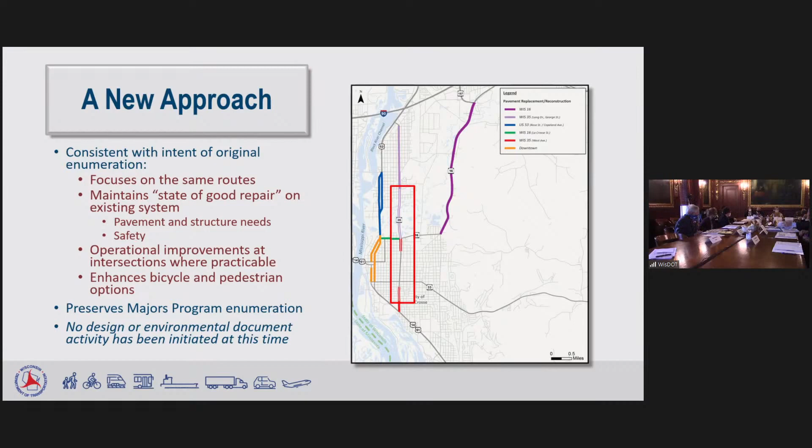If I don't want to force discussion, I've got a proposed motion I could read if somebody wanted to make it and second it. So this time, can we have a motion to approve the department to continue using the existing enumeration of chapter 84.013 sub 3 sub AE, to study new alternatives addressing safety, congestion, and maintaining a state of good repair on US 53, Wisconsin 35, and Wisconsin 16 in La Crosse County.

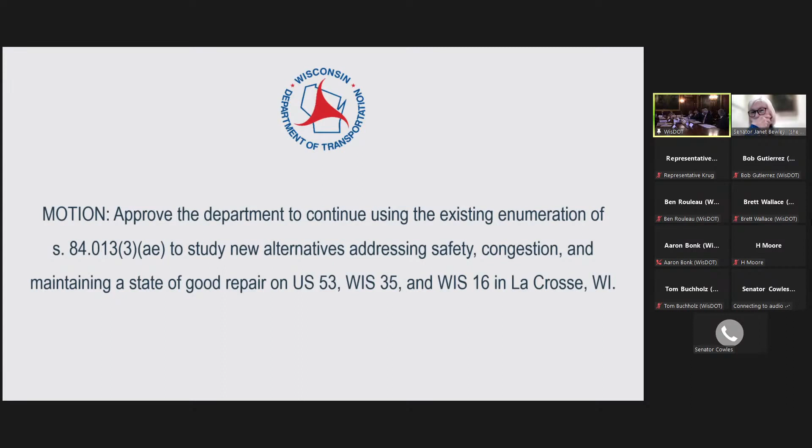Any other discussion on the motion? If not, all those in favor signify by saying aye. Aye, aye, aye. Thank you. Those opposed? Okay, motion carries unanimously. Thank you.

And then finally, I know we're running tight on time, and there's building commission coming up too, so we'll keep this quick. But we did want to, as we talked about the Lake Interchange, this isn't necessarily the typical thing that comes before this committee, but we do want you to have sort of a 360 view of high cost issues that are out there. So Jeff, if you want to give a brief overview. All right, so the I-794 Lake Interchange in Milwaukee County.

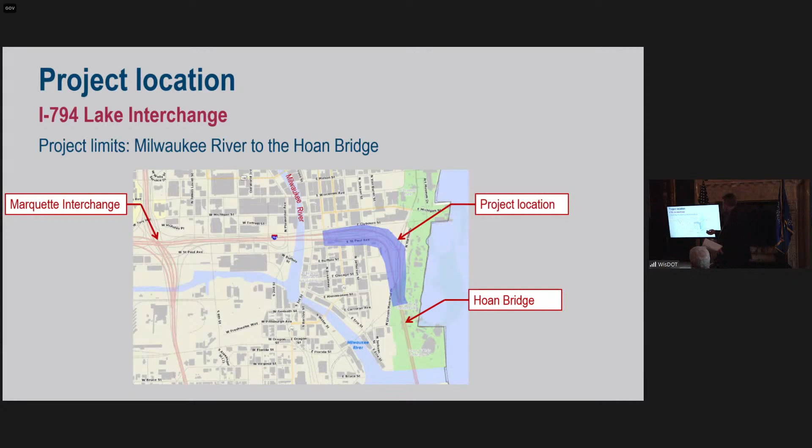Okay, so just to show where this is, it's kind of between the Marquette Interchange and the Hoan Bridge. You can see the highlighted areas where the Lake Interchange is. Originally, this Lake Interchange area was part of the Marquette Interchange, and it wasn't quite ready to be done then, so we got more life out of it and held off. It was originally part of the scope of the Hoan Bridge, and we did actually do some work in some of this area with that project, but we could hold off. But now is the time that we need to do something with this Lake Interchange.

And we talk about it as being a bridge project, but it's really multiple bridges. There's 28 bridge units, and all but one of them were built in '74, '75. The majority of bridges are box girder type. So what does that mean? I'll show you in just a second. The design for this type of structure, when it was built, is only 50 years. What we're designing today gets you more life, but this type of bridge was only designed for a 50-year service life, and we're already at an average age of 46 years.

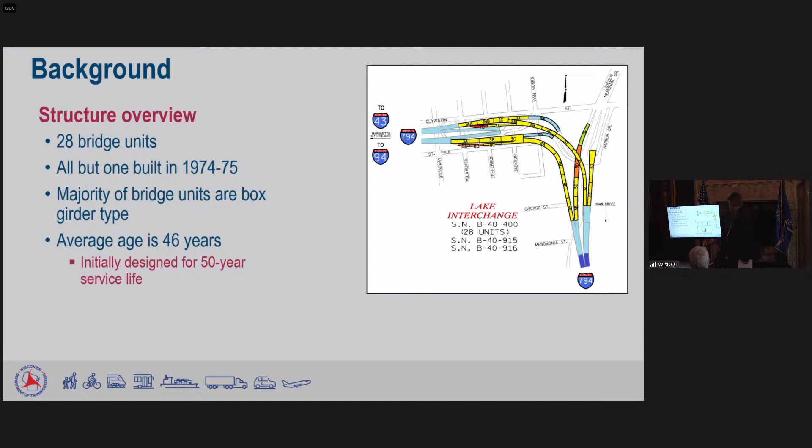So this just kind of shows you what a box girder looks like. See how it's shaped like a box? So you can't take the top off and redeck it. You can overlay it, but you can't redeck it. So there really are not many options left, and it just needs to be redone.

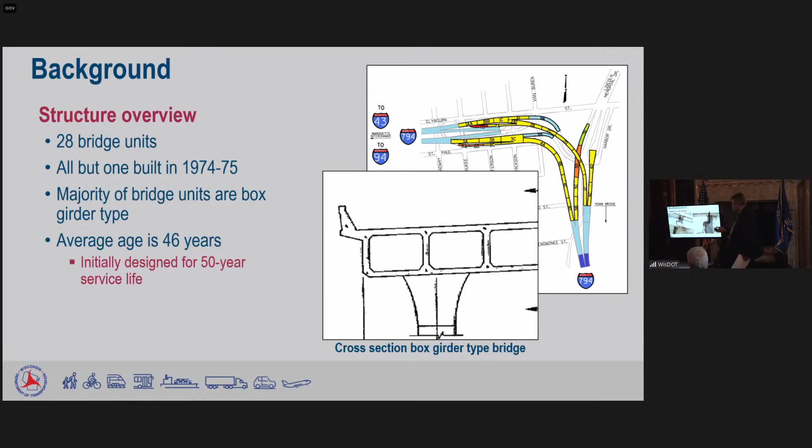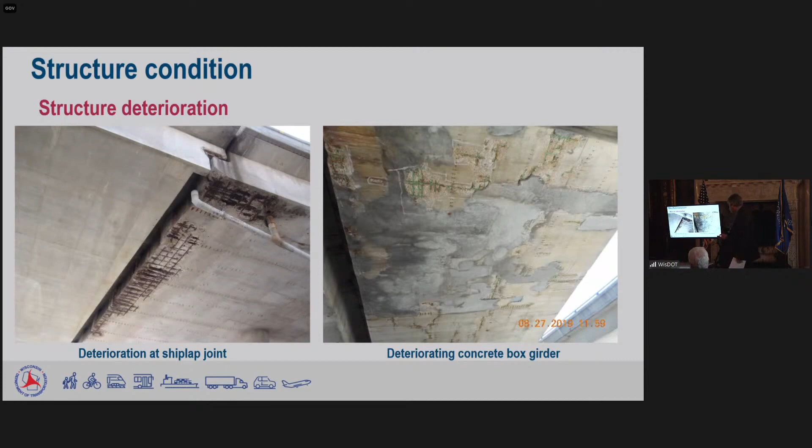So I have some pictures here. These are the shiplap joints, and you can see some of the deterioration. Some of these pictures look kind of scary when you go through. You see the deterioration at the joints. These are some surface stains coming through. Some of the box girders don't look in the best of shape. Here's a shiplap joint bearing that's not lined right, some exposed rebar.

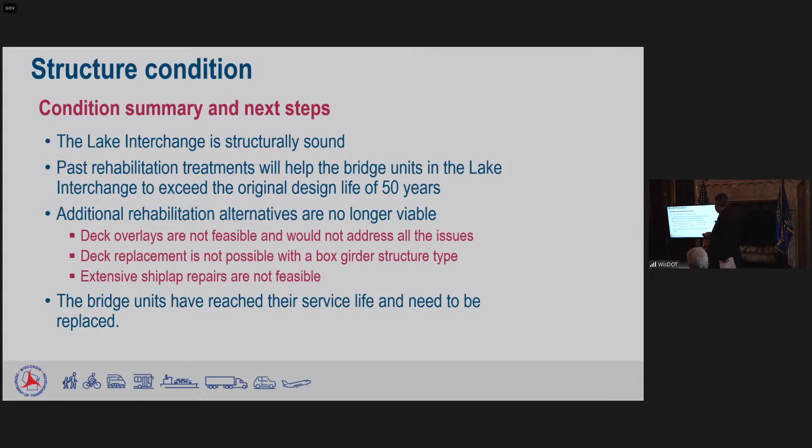Looking at these, you might get kind of scared about it, but we're going to assure you that we inspect this bridge often, and it is structurally sound. It's not a fracture critical bridge, but past rehabilitation treatments won't work here anymore, and we're coming to the end of its life. So what we're saying is that it's reached the service life and it needs to be replaced.

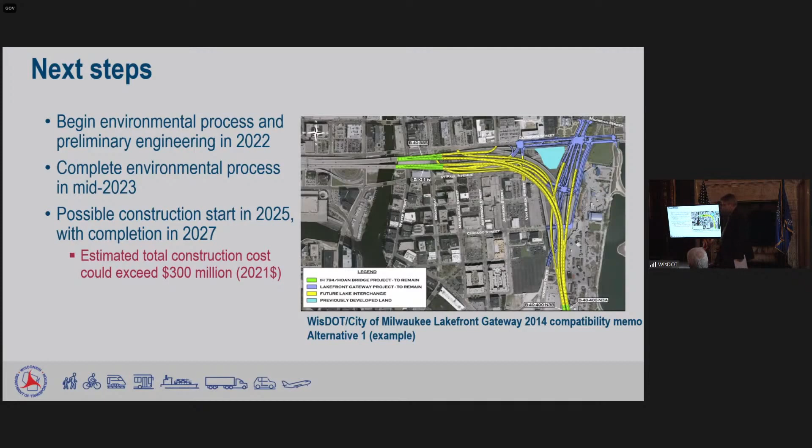So what are the next steps for this project? We are beginning environmental process and preliminary engineering in 2022. We'll complete the environmental process in 2023, with a possible construction start, depending on what happens, as early as 25, with completion in 27. The estimated construction cost here would exceed $300 million in 2021 dollars.

So why am I talking to you today? There's no action required by you, but it is a big project, so we want to give you a heads up on what's going on. This project is expected to be funded as a high-cost bridge project, and the only other project we've had in history like that is the Hoan Bridge. So this would be the second project like that.

With that said, I want to give you another heads up on another upcoming bridge. It's a border bridge on I-535 in the Duluth Superior area, and there's an important piece. Jeff mentioned 28 structures, and there's a state statute that came into play that basically says a state bridge, not a border bridge, that costs $150 million or more needs to be in that appropriation. Now you're just starting the process, but this is north of $300 million, and so that statute says a bridge. Well, this is 28 bridges.

Our estimate so far, early in the process, and I might have these reversed, but they're very close: 85% of the cost is associated with structure, and 83% of the area in that interchange is structure area. So we think that this really acts as a structure, and therefore it's appropriate for that statute. Yeah, very good point.

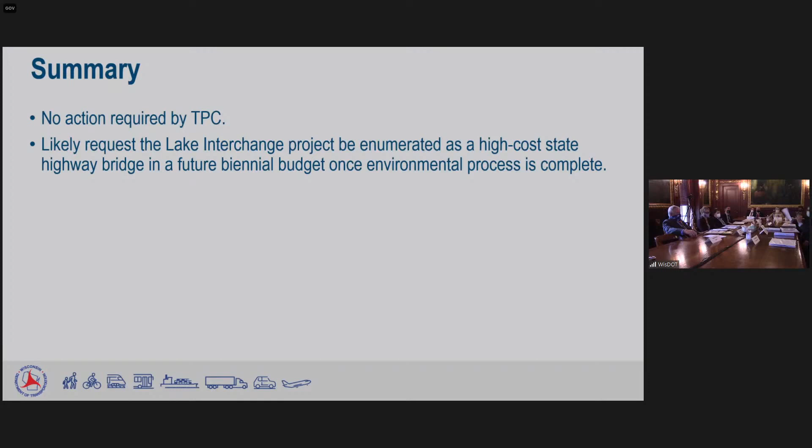I do know some work they're doing on bike-ped connectivity in this area too, to make sure that all works and is incorporated into the project. It would be good if Bob Gutierrez could make sure we're on target.

It's an area where you might park in the Third Ward and walk to Summerfest. It sounds like the principles you all use to think about the La Crosse projects kind of help everybody get on board. It'd be a shame if Summerfest were cut off because the bridge reconstruction was done in a way that... I was describing anecdotally how my family used it to get to a playground and a park on the other side of the bridge. Usually you can park on the side of the bridge, but sometimes you walk through it, and I see people biking there or doing other things. It seems like the La Crosse project used those principles to get input from people on how this is used, not just for trucks.

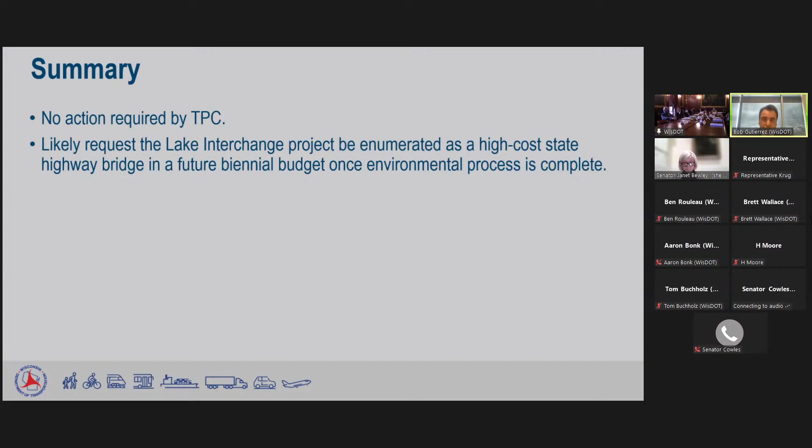Yeah, absolutely. We are already in discussions with the Department of Public Works and DCD at Milwaukee to understand those touchdown points for development going on right now at the Couture, or future development of buildings and parks like you talked about. We've also talked about what those connections look like, and that community sense you want at those touchdown points to make them safe for both pedestrian and bicycle accommodations. We'll certainly continue to work with the City of Milwaukee on all the aspects and attributes they'd like to see.

One quick thing - about 20 or 30 years ago there was a partial bridge failure on the Hoan Bridge due to defective steel from a Pittsburgh manufacturer. The places that were replaced, those segments, how are those doing? Have there been any additional problems from that?

We have Aaron on the line. Can you answer that question, Aaron? You're on mute. Sorry, just getting off mute.

Yeah, so everything from the Hoan is safe and sufficient. There are no defects stemming from what happened more than a decade ago. There was a recent project that removed and replaced a number of other sections with the overlay project on the Hoan Bridge, but there's no safety concerns. The life of the Hoan should have been extended with the last project, done a couple of years ago, for 40, 50, 60 years at a minimum.